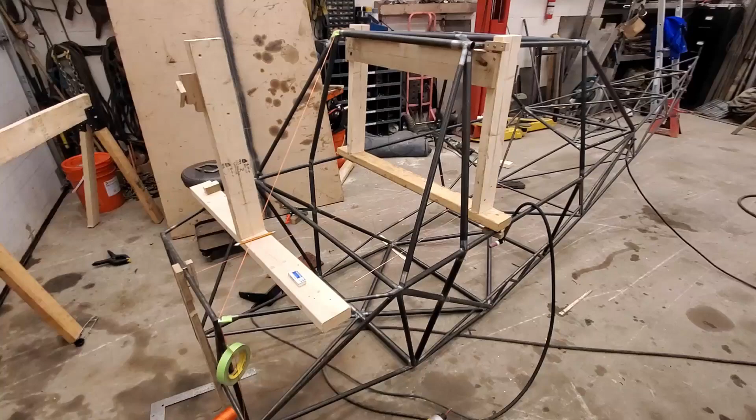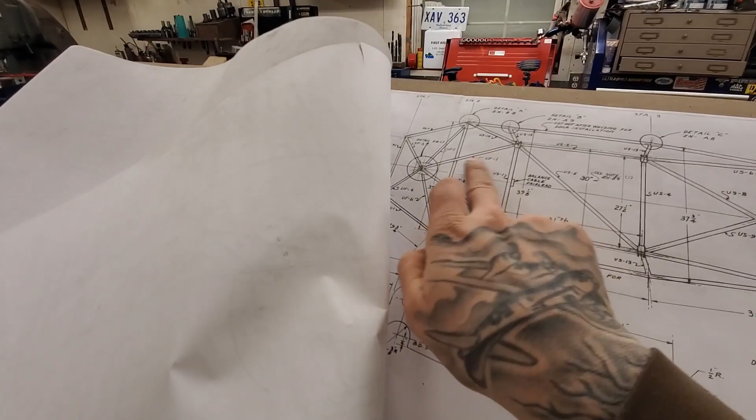So, I'm starting at the windshield X here now. That's these here tubes. And top down view looks like this. So it's this X here that I'm working on. And we're not going to worry about these two tubes here.

They're just for stabilizing. But in the last episode, if you remember, when I was tacking, I wasn't sure what I was going to do for jigging it and laying it up. And I mentioned that, and I wasn't sure if this was a straight shot because I have seen people do that. But yeah, I know it probably works for the PA-18, but this one here, at least in the WAG aero plans, it's different. It's not flat. And as you can see, it's 8 3/8 up and 8 1/2 from the firewall.

So I got this repurposed jig. That was the back part of my top deck thing there. So this is what I got going on now. I just got it screwed here, and I marked off 8 1/2 inches back and 8 3/8 up. And I got a string representing that tube, and as you can see, if I put it flat, the intersection will be, I don't know, up around here, I guess. My eye and what the camera's seeing is different because we're on different angles, but anyways. But that's where it's supposed to intersect, so it's got to be quite a bit different.

So this is not the straight line, and it's also on a different plane, so yeah, it's got to be over here. So I'm just going to go ahead and cut this off basically. I'll get the line from here down at the firewall. That'll be that angle. And I'll probably just cut this off square. And we'll work with that.

I got this cut off now. And like I said, I went from that point down to the firewall tube. Drew it out, and then I went 3/8 of an inch below that line because it's 3/4 tubing used for this. So if you left it where it was, your intersect point would be 3/8 of an inch too high. So right about here is where everything got to be. I might have to come back and cut the top off of this a little bit more, but for now I'm just fitting the two on the bottom to come up and intersect here, and then if I got to trim this after, then that's no big deal.

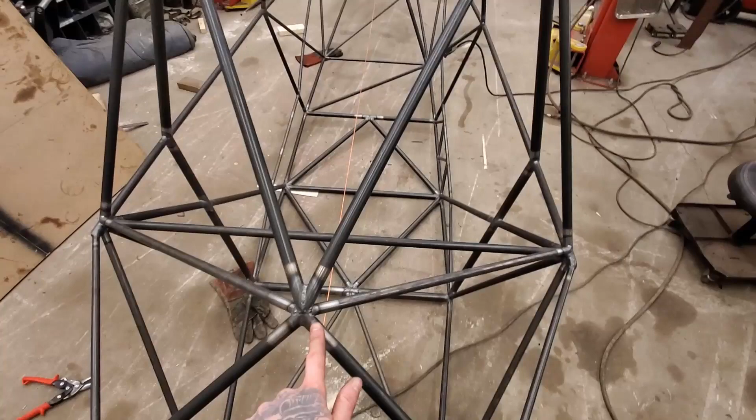Well, as you can see, I got the front done. These 2 tubes are pretty easy. I just fit each one to this bottom section here, and once each one was fitted individually, I just kept bringing them together in the center until everything fit good. And then these 5/8 tubes are pretty simple to fit up. So that's it for that, except for the couple gussets that got to go in. There's 1 on the bottom and 2 on either side here.

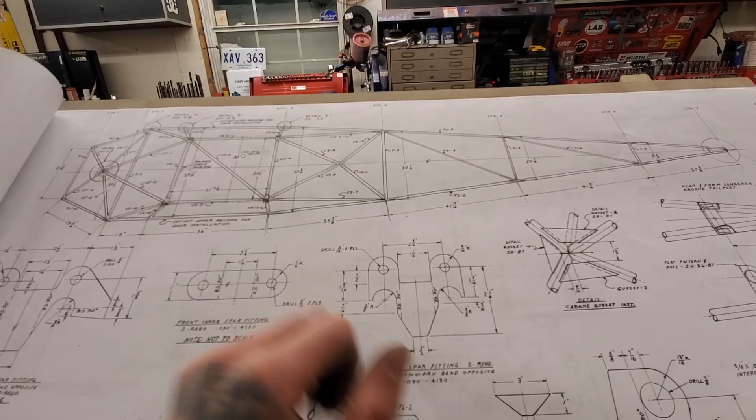The only thing left now to finish the top section is the Cathedral here on the back. That's basically just a little bit different version of what's on the front. It's a little more pronounced, and those 5/8 stabilizing tubes on this one don't exist on the back. It's just the 4 tubes. And they're 1 inch, same as all the other tubes going to the top, except for the ones in the front. Oh, and these ones here, forgot they were 3/4. So I'll start at that now.

Alright, buddy, back out here again. Dog's helping me.

Getting the back X section here, the PA14 Cathedral, as they call it, jigged up. Basically doing exactly what I've done on the front, only this time I'm starting off doing what I ended up doing on the front, going right to this edge here. Same thing, screwed to the upper longerons and got the height set on the 2x4 there. If you're wondering, I got the string ran here so I can get a measurement from the top of the tube to the cluster, because that's the way they're measuring it on the drawings. It's to the top of the cluster, so that's how I measured it out.

And this 2x4 is a little bit lower. The measurement from here to here is not 10 7/16, it's 9, or a little bit less actually, because you got an inch of tubing that's got to go up here, so keep that into account. I strung a bit of masking tape to get a quick visual, and it does look good. Looks the same as my PA12, which has the PA14 Cathedral in it, because normally the PA12 just got a straight tube from this corner to that corner. It was just one cross tube.

Doing it this way adds a little bit of strength, I would assume, and gives you more room in this area for baggage, because instead of having a tube down at the same plane as that string, you got all the way up to here now, so it's a little bit better that way, and it looks cool.

So from what I can gather from the plans, this is where it's got to be. So I'm gonna start cutting some tubes now and fitting them up and getting them in place. Well, cathedral's in. Looks good. I'm happy with it.

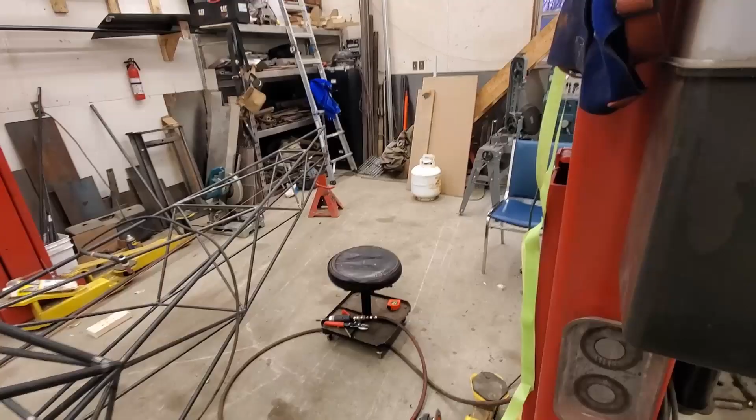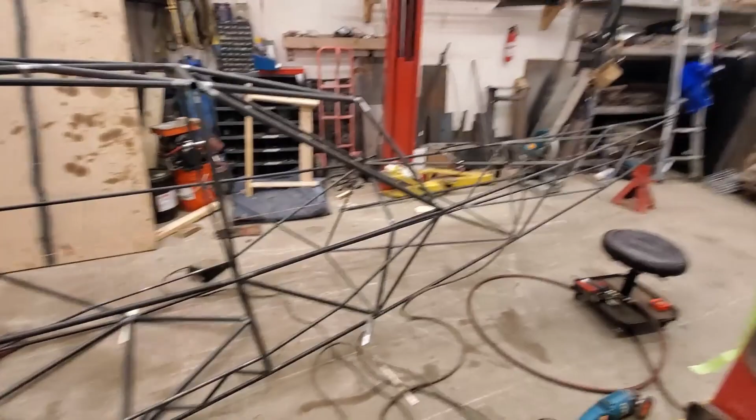Plus I got to build my suspension and the jack screw tower, which won't be holding the jack screw. It'll just be for the forward of the vertical fin. But as for the actual main fuselage components, this is what you got. And I just counted, and I have 104 tubes into this. So yeah, there's a lot of work that goes into it.

So 104, and then I got those 4 there to go on the other side. That'll be 108, and a couple brace ones on the back there. Yeah, these ones. So that's another 4. So it's 112. And for a timeline to get where I am right now, after I fill out my logbook for what I've done today, it should be 147 hours. I'm pretty sure I had 144 when I filled it out yesterday, and I done another 3 hours here today.

So we'll say 150 hours to get here. By the time I do them 4 tubes, I'll be at 150 for sure. So it is a lot of work, but it's not too bad. It's just same as eating an elephant, one piece at a time, and it comes together. If you look at it like this, even me now looking at it, I'm kind of blown away that I managed to put all this together.

But if you just look at it one step at a time, worry about getting that 1 tube in. Once that 1 tube is in, then worry about the next one. Don't even worry about the ones after it. And don't worry about brackets and all that stuff until you got to go at them. Just concentrate on what you're doing right then and there and get it done. And it ends up not being too daunting of a task.

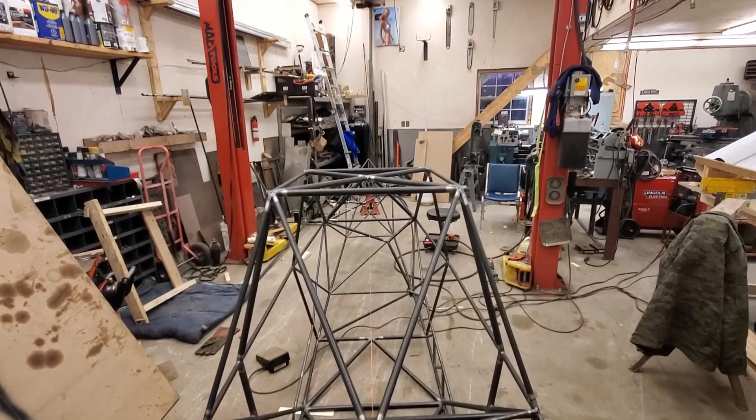And everything lined up good. I don't know if I can get it to do this on the camera. Yeah, Jesus. I don't know how I'm going to pull this off. With my eye, I can line up the X in the top deck with the join in the cathedral with the tail post, and I can see the line, and the line intersects here in this cluster. And I know it's the center and firewall. So everything stayed pretty straight, which I'm happy.

The rear of the plane, that's gonna be lots of videos, or a few of them. It'll be more than normal because I'm changing a whole bunch of stuff back there, different suspension. I'm changing the size of the control surfaces, and I'm changing the trim system. I'm not using a jack screw, I'm using a linear actuator. So it's gonna be a bit of figuring to get all that in the back, because I gotta try to stick a linear actuator in there and a shock basically in the same location. They both want to live in the same spot, I'm thinking, so it's gonna be a little figuring and trial and error on that one. So stay tuned for that one.